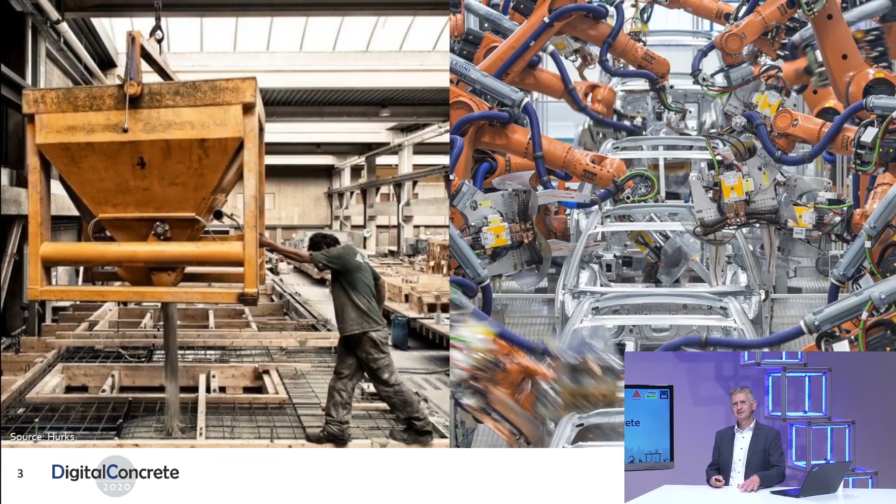And we're not the only ones doing that. If you look back in history, different industries already had that idea, to look how digitization could be helpful to improve on these societal issues, as you can see on this slide. We as a group, and more or less as a faculty as a whole, work on that issue of digitization as well, from different perspectives.

So we work on digital twins. We also work on artificial intelligence tools combined with material tests and with algorithms to bring robots to life, trying to combine AI with the issue of robotics.

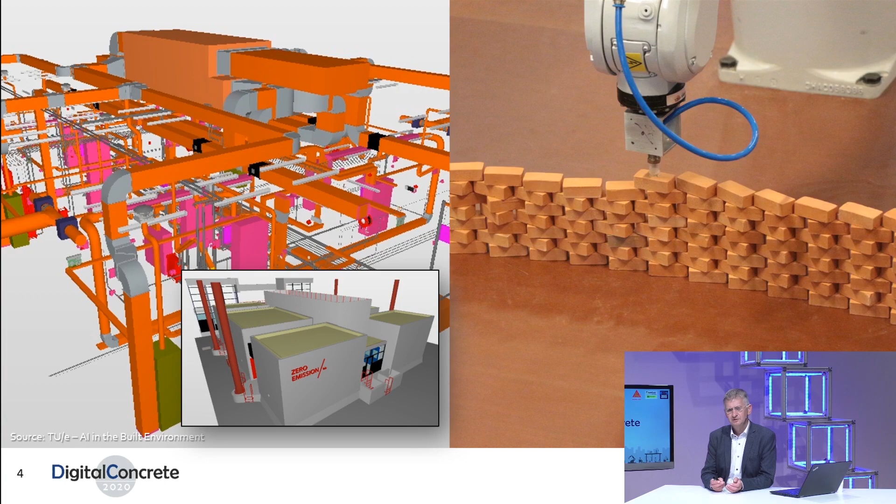As a chair in our group, as you are familiar with, we focus on the issue of 3D printing of concrete, and this large-scale gantry printing robot, I think, is known to many of you already. And with that instrument, we made a first bridge in Gemert.

And that was for the simple reason, coming back to your question for the meaning of the construction industry, to just try and make an effort in making something, show that to the industry and say, this is what we can do. Please reflect on it and tell us if that is beneficial for your industry as such.

What we realized from this kind of work, since it was the first time we did it, is that it is relatively difficult. It's not self-evident. It comes with a price because it's a complex system. You cannot just print whatever you have designed. The material, the design, and the printer need to come together. It's more or less a complex system that has to fit together and make a full system as such.

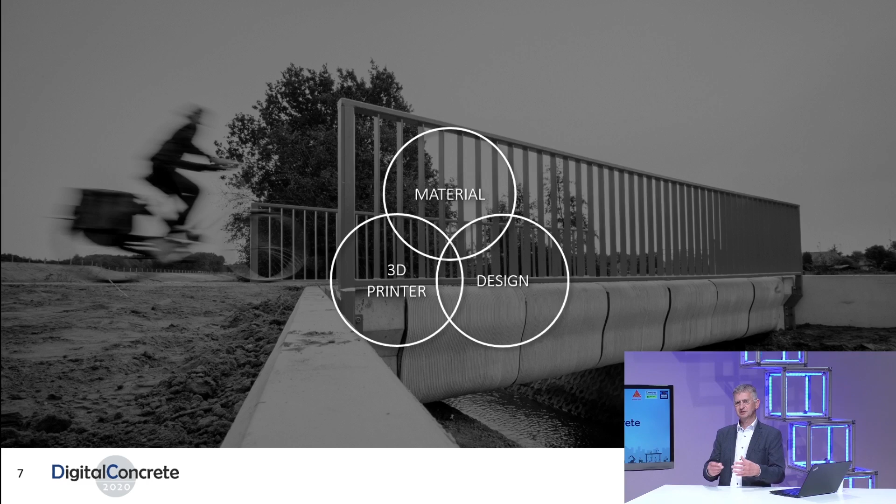Okay, so I guess it's important to emphasize that 3D concrete printing and other digital fabrication tools can provide an answer to these challenges in society, but at the same time it comes with added complexity, and we have to address this as well.

You wanted to illustrate this vision with two projects. Why these two? Yeah, I selected these two projects: a housing project, Milestone, that is currently being printed here in the city of Eindhoven as we speak, and a bridge project designed by Michiel van der Kley.

I selected these two projects to illustrate that our Faculty of the Built Environment is a typical faculty where built environment, buildings, and civil engineering are combined into one faculty. So I selected these two, and the second reason is that one is more difficult than the other, but I'll come back to that issue later in this talk.

Well, then I hope you can tell us a bit more about these projects. I would love to. Let's start with the building project.

These buildings, and I guess you have seen the images before, mainly the important part is the plan view. If you look at the plan view, what we did is we approached the design from the perspective of that complex system I just mentioned. What we see here on the slide is that we actually printed corner elements, so volumetric elements, not a straight wall, but walls in a corner, curved walls, because they are stable in themselves.

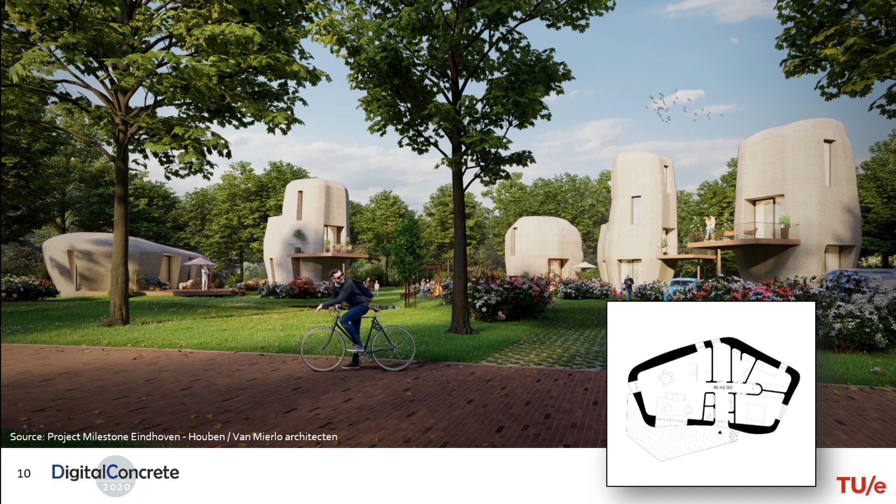And they were printed on a slab. So actually what you have is a part of the slab of your building and a wall already on top of it, and that's a wall with a corner already in it. So it makes it very stable, and it makes it easy for transportation.

That's the plan, and in between these elements, you could place framework elements and put your roof on top, so that the load-bearing capacity is both on the framework and on your printed concrete. That's the idea. And all of these elements can be reused again, of course, because you can place them in a circular kind of economy in different plans of different buildings.

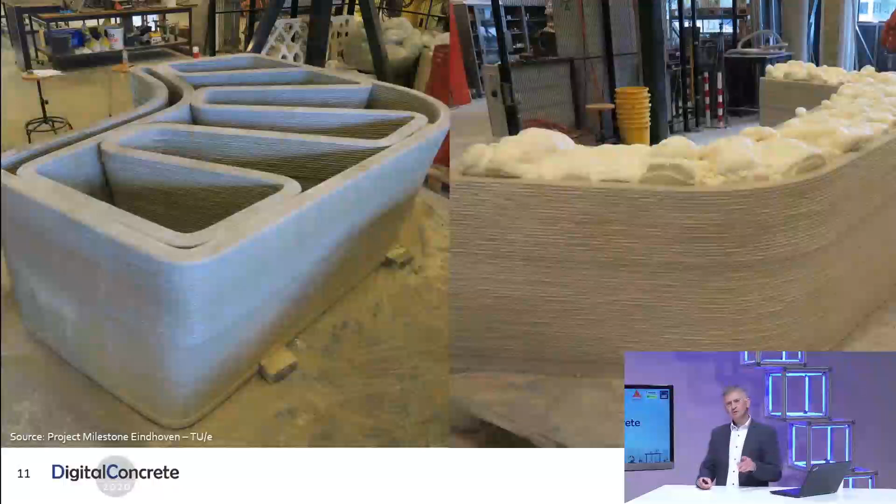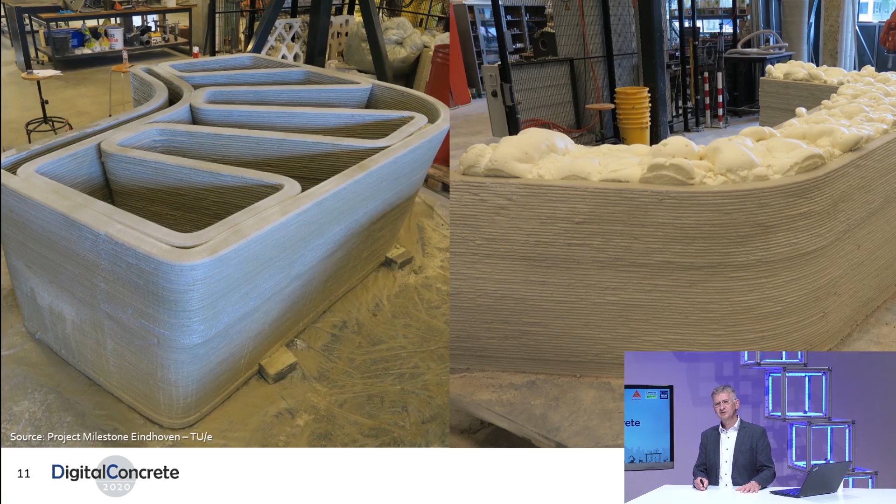If we look closer at these walls, on the left-hand side is an example where you print an inner and an outer wall, and connect them with a snake kind of pattern that we see often in 3D printing and extrusion processes. But if you make a real house, it must be comfortable, so you need to fill that in with insulation materials. On the right-hand side is a first try for the fill-in, but imagine that fill-in material could also be used for structural purposes, taking care of the shear capacity of the wall.

Then you can cut down on the amount of concrete that you actually print. If that's the system we're aiming for, it comes with a couple of questions.

For instance, in the fresh state, when you start to print this wall, it must be stable, and you want to optimize these sandwich kind of structures towards thinner and thinner walls, for reasons of sustainability. But it must remain stable during the printing phase, and your research work is a nice example of what we need to do in that case.

The other issue is in the hardened stage, when the concrete is hardened. If you make it thinner and thinner, it comes with stability issues again. And there, the presence of the insulation material should be beneficial and help the concrete not to buckle. So it's really a marriage between two materials here.

At the end, if you want to make these walls into a system for real life buildings where people live, you need to test them. And luckily, we are in a fortunate position that we can do large scale tests to see if the theory we come up with also works in practice.

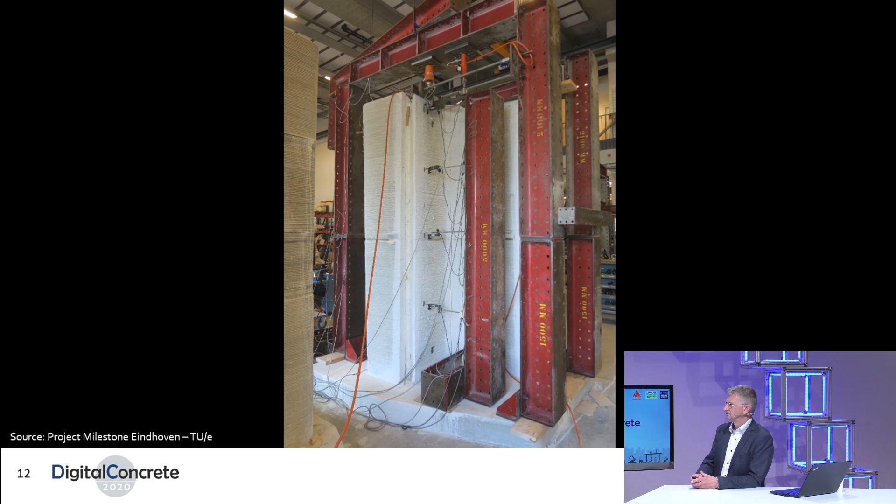That's very clear. But up to now, you've mainly discussed the design and the concept of Project Milestone. You mentioned also that it's important to consider the material and the 3D printer. Can you elaborate on these two topics as well?

I guess the message was already sent by the first keynote speaker, Robert Flatt, who had a nice formula saying that if you look at sustainability, you have to consider the amount of material and the amount of cement per unit of material, multiply that together, and divide by the lifespan of your structure. So talking about reduction of concrete, that's why we print, that's the additive manufacturing part. But yes, you need to discuss the amount of cement per unit of concrete as well.

In our group, we work on that issue, and it's our colleague Sandra Lucas, who unfortunately cannot attend this conference because she just gave birth to her first son. Sandra is working on the issue of materials together with the design, because in a complex system, these two things come together. Her work focuses particularly on two things.

The first is sustainability from the perspective of emission-free concrete, making emission-free concrete. The second is doing something different, adding functionality to the concrete, so that the concrete is no longer only the load-bearing part of the structure, but maybe also does part of the insulation itself, or provides electricity conductivity at some parts of the structure. So taking on more than one function, which is also a way to increase sustainability.

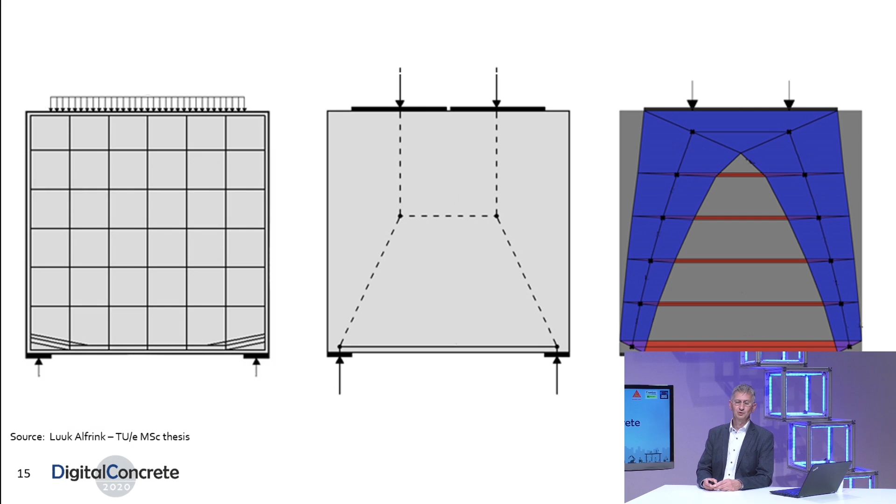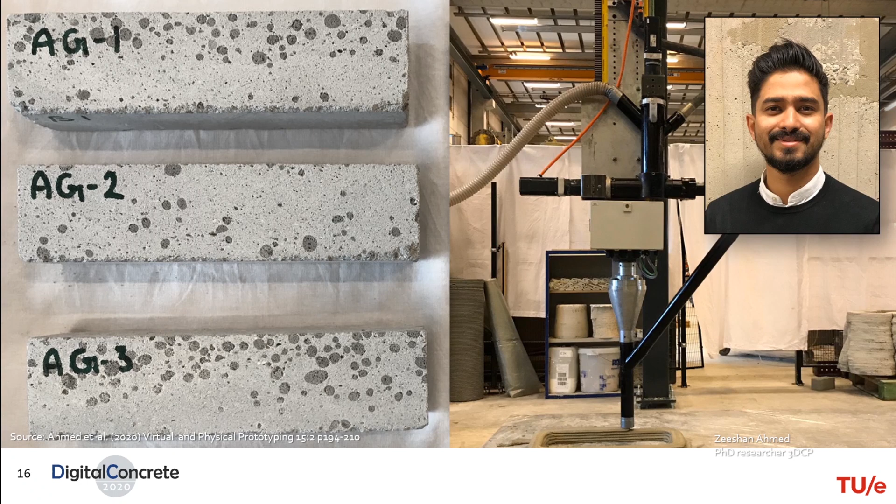One typical way of working with that is this. Zeeshan Ahmed, one of the PhD students about to graduate soon, developed a grading type of material where material is deposited where you actually need it. So concrete that is strong in one place, and at another place is just taking care of, for instance, thermal insulation. Imagine going back to the sandwich wall picture — if we could print a sandwich wall but apply different material properties at different places, you'd have a kind of hidden structure you can't see with the naked eye, where one part does the structural job and another part does the thermal insulation.

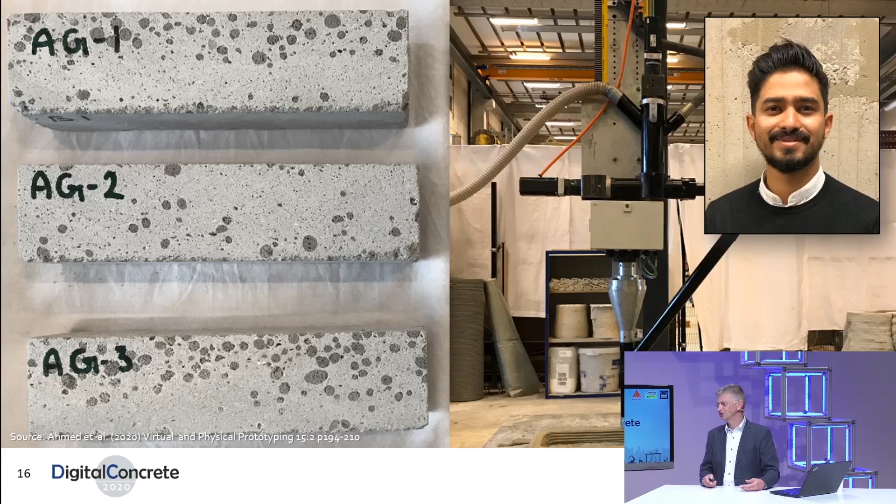Making things like that comes with a price, with a cost. So you really need to do research, because in the end you want to be sure that the right concrete is at the right place with the right properties. Starting from the perspective that the properties of concrete must be good, you need to think backwards about what you need to do in your mixing, your pump, your hose, to really get that done. That's what Derek Bos, one of our PhD students, is doing in his research here at our university.

At the same time, you have to do something on your machine, your robot as well. This is one of the early things we did when we got our gantry robot — we mounted it so we always have a fixed height for the next layer on top of the other, to stay in control and avoid issues like the poor bond we've heard a lot about at this conference.

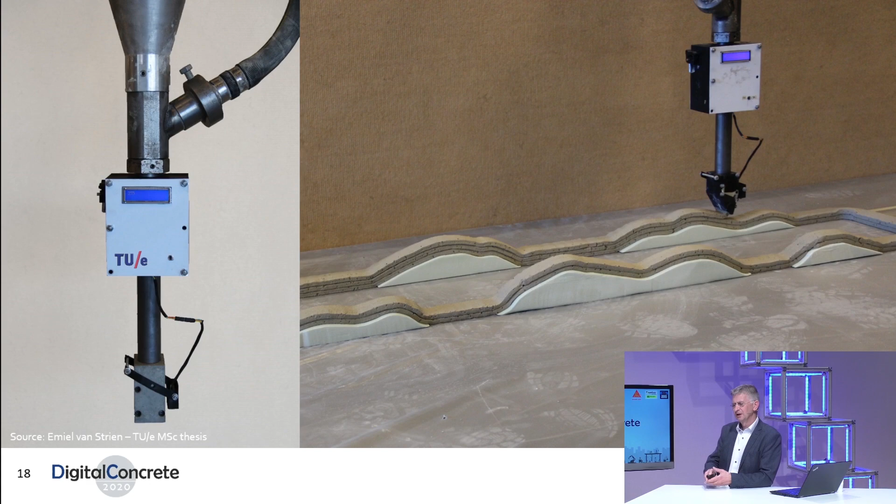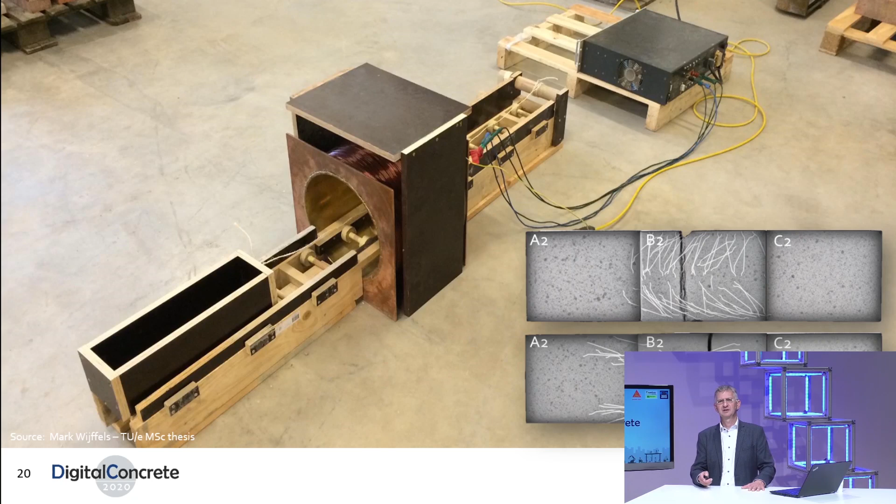Other things we do to stay in control include playing with temperature — what temperature means on fresh concrete, related to stability issues of course. And one of the most unusual things we've done, and will likely do again in the future, is controlling fiber orientation even after printing, using magnetic fields.

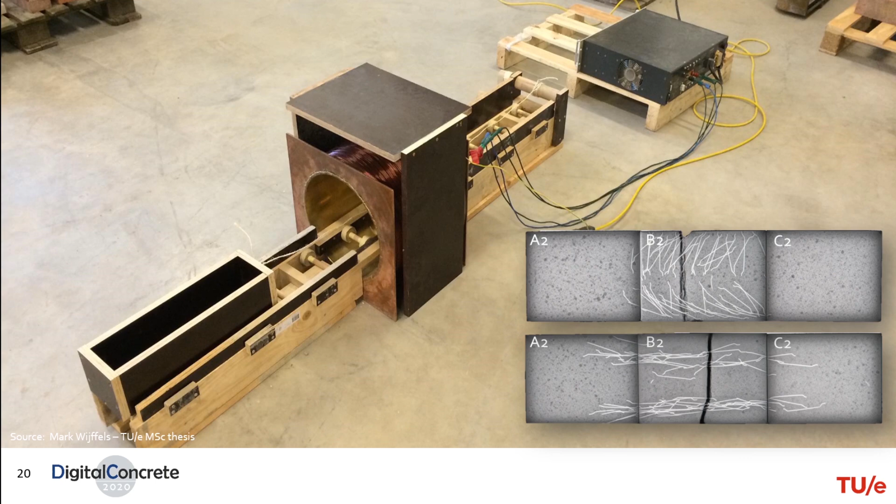Talking about that complexity, to wrap this part of the story up — what we do is modeling, and at the same time testing in the laboratory. But in this age, a third thing comes into the picture, and that's data. We're going to use data to add to that story and help us solve more complex issues.

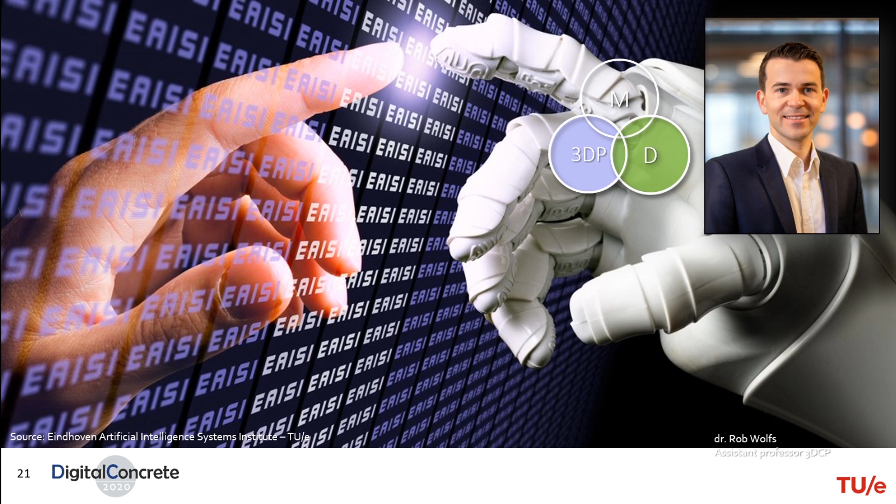And that's your cup of tea in your research work.

Right, absolutely. It was also Maarten Steinbuch, one of our keynote speakers on Tuesday, who said data is crucial. So we will have to start combining numerical approaches and simulations with data-driven approaches like non-destructive measurements, to be in full control of the process. I think we can learn a lot by venturing into other fields and connecting with other industries to bring our technology one step ahead.

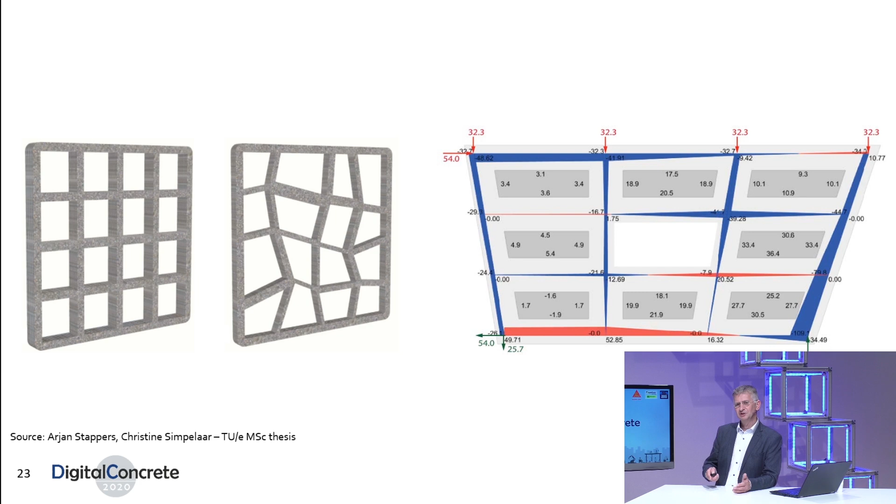We call it the stringer panel method. It's a simple design tool, very simple to design with tools like this. From that, we came to the idea to not optimize only from a structural perspective, but also optimize these walls from a perspective of lighting, making walls and facades that are not only structurally optimized, but also optimized with respect to the amount of light coming inside our buildings. And with that came this picture.

But you're questioning me, Rob, but actually this is the work of your studio this year. So I challenge you to explain the picture yourself. Okay, I will. This is actually the excellent teamwork of three of our master students, Tessa, Irma, and Jelle.

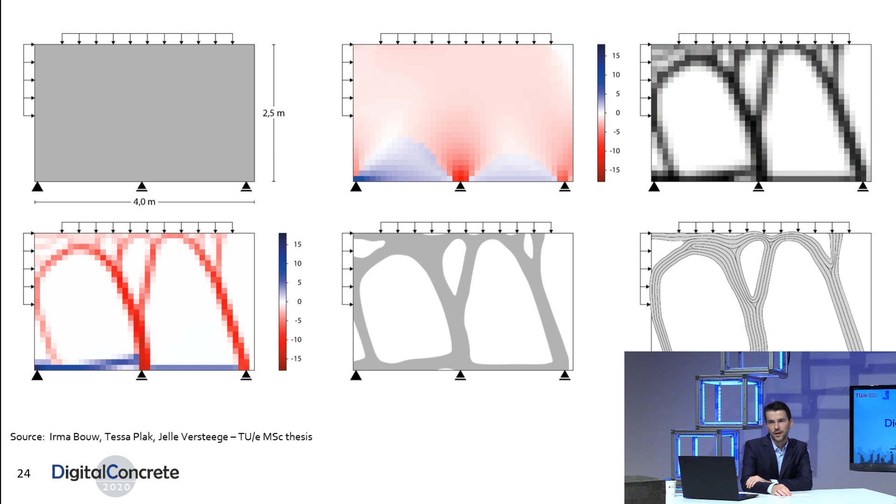The next step is to transfer this into a solid geometry and generate print paths. For that, we use evolutionary algorithms to select the best, quickest print path within millions of solutions, making sure that also at the nodes, print lines do not cross, and that we have proper anchorage of, for instance, reinforcement in these elements. So I think this is a very promising development in our field.

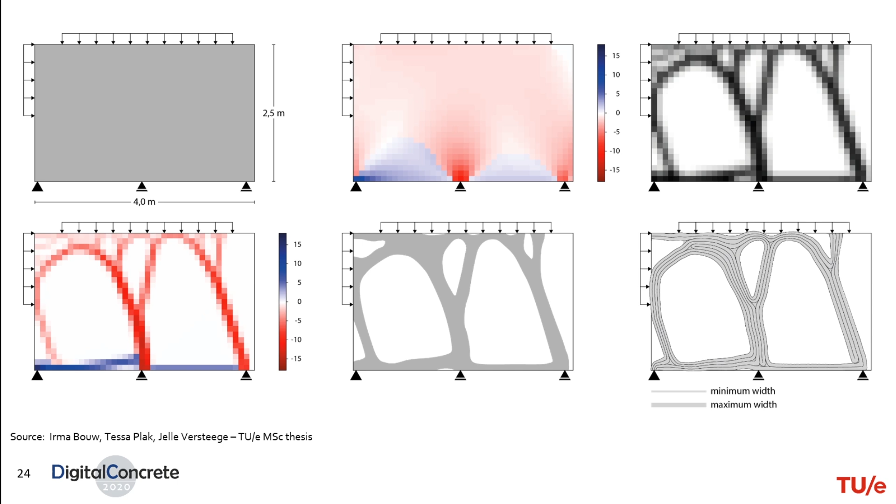And again, Rob, I think you have to combine that again with the type of material that you use and the capabilities of your robot to make it a complex system again. Absolutely. Yeah.

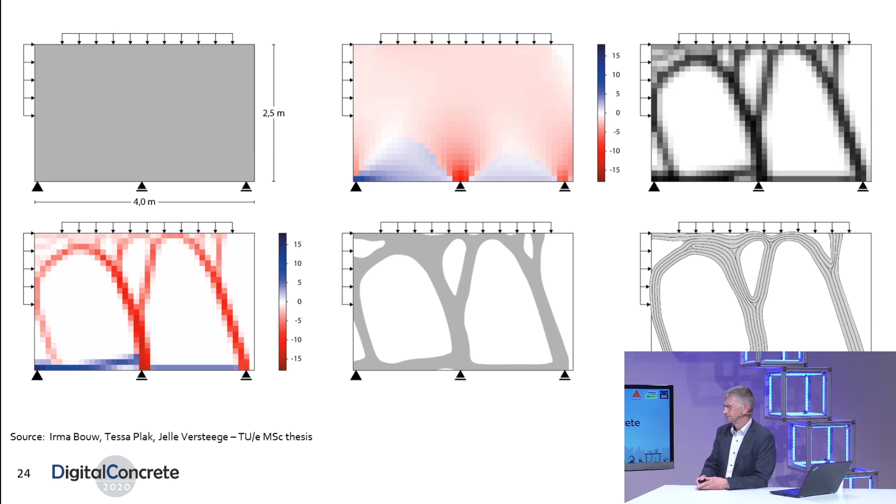Having said that, I think there is a downside to this thought, because before we become too enthusiastic about it, there's always a but. In this case, it's about the joints. The advantage of working on milestone projects with these corner elements is that there are no joints, only the joint between the window frame and the concrete elements, but that's a non-structural joint. But if we work on wall structures and slab structures, and we need to connect slabs and walls together, there must be connections that are capable of carrying loads.

However, if we move to the other structures we just showed, the wall elements, we need connections that can carry loads in compression, tension, but also in shear, and hopefully in the future in bending, but let's make that the next step, I would say. And that makes it more complicated. So we really need to look after that.

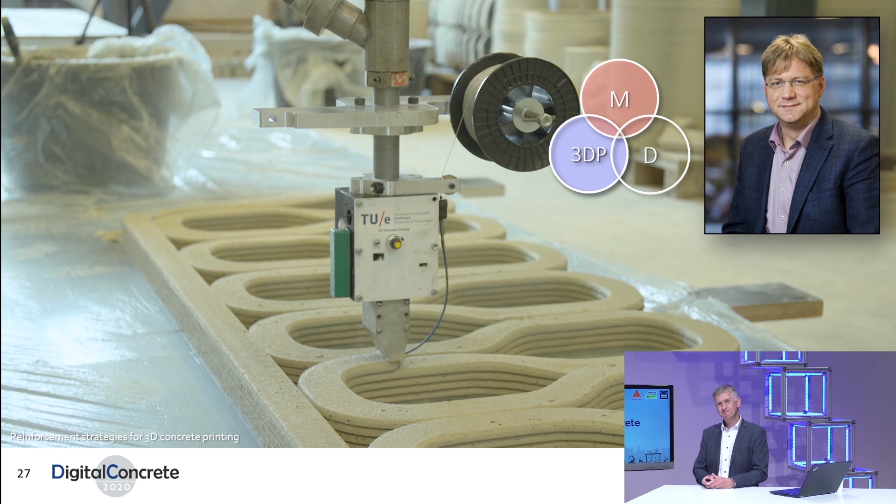Yes, Jimmy, I will address the issue of reinforcement. And we already addressed it a long time ago. Zeeshan Ahmed, who I introduced earlier during this talk, developed this tool to embed the reinforcement wires immediately during the print process.

But that's one thing, making the tool is step one, but then the next step, of course, is to go further in this field and investigate the true meaning of reinforcement systems like that for 3D printed concrete from a structural perspective. And that's the research field of Freek Bos, looking after the structural properties of reinforcement.

And of course you have to combine that again with the material, because one comes with the other, so the complexity is here again. His research work is on finding out what the true meaning of reinforcement systems like this is in terms of bond between concrete and steel.

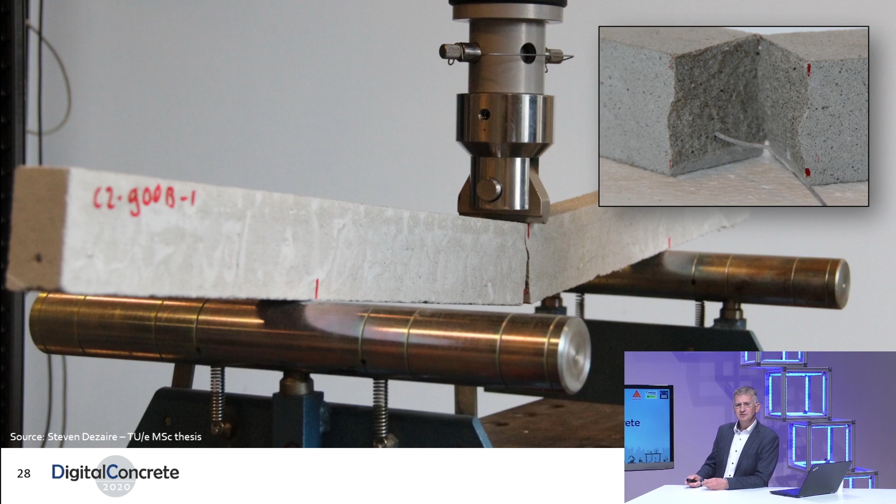It started with something like just confinement and is now developing towards real bending structures, where the reinforcement needs to have a good bond with the concrete, as you can see in the picture here. But that's still reinforcing in the direction that we are more or less familiar with already.

The next step he takes, together with a PhD student, Lauri Hass, who you met before in this conference, is working on the perpendicular direction. So that's reinforcing layer by layer perpendicular to the layers, in this example by using a screw type of reinforcement.

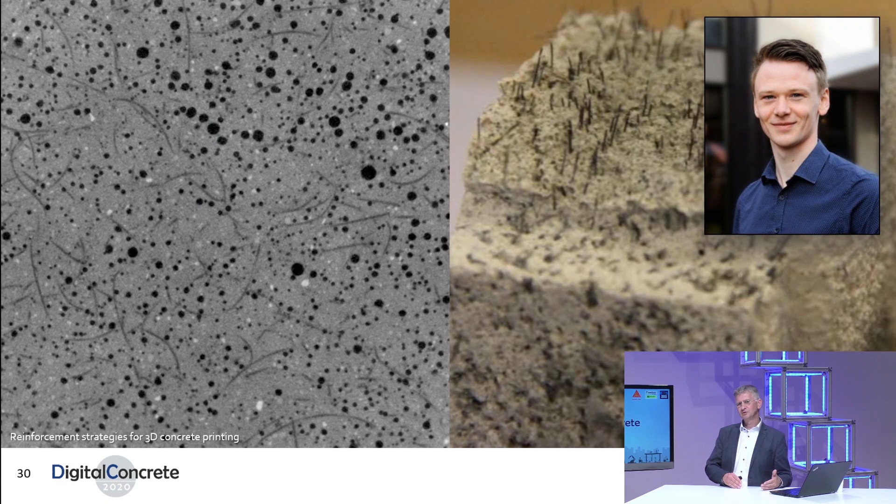Another idea of working on reinforcement, but okay, we can argue whether this is reinforcement or an improvement of the material, is the introduction of fibers into your matrix.

The picture on the right-hand side is an old picture from the work of Zishan embedding the fibers in the structure, now being followed up by Karsten Nefs, another PhD student you have seen here on stage during the conference already. He's working now on totally different types of fiber reinforced concrete, the ECC materials, where not only fiber orientation matters, but also fiber shape matters, because they're not straight anymore.

And what we always want to do, as I told you at the beginning, is try to do experimental research, do laboratory research, at the same time make numerical models, and have that data AI tool available. He is, for instance, using an AI tool to get a grip on image capturing and making models from that, using neural networks to create these structures, as you can see here.

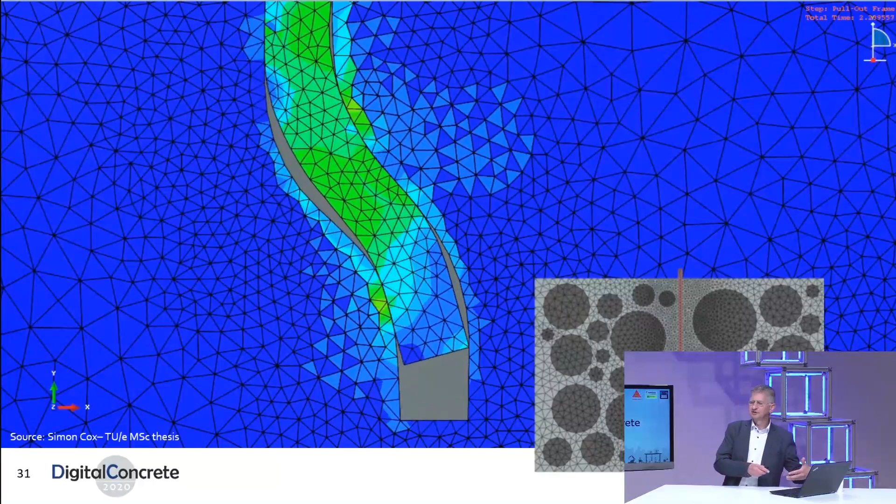This is one of the examples of the numerical models that we use. This is just an example of one fiber being pulled out of concrete using cohesive zone modeling. And that's something that, to my pleasure, I saw during this conference as well from multiple authors working on issues like this.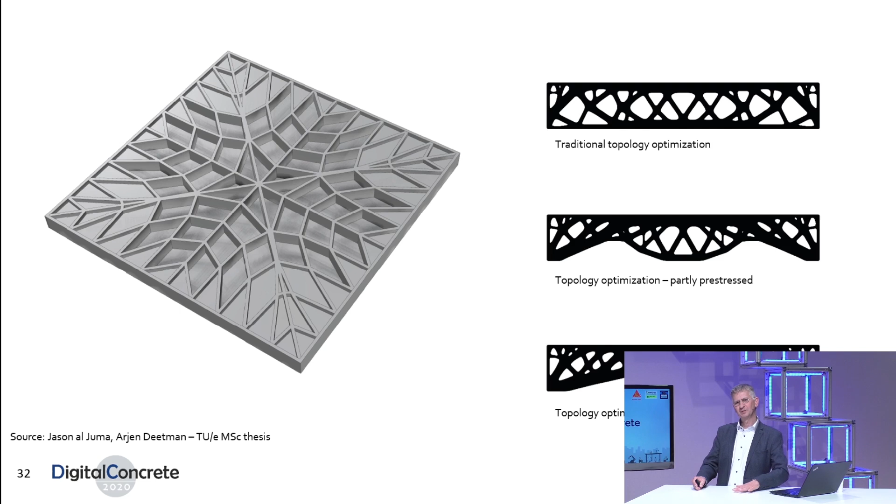What we did here is we tried to make it reinforced as a slab, made it pre-stressed as a slab, and tried to make numerical design models that not only took into account where to place the material, but also how to deal with the pre-stressed ducts.

So the level of pre-stressing was determined by the position of the load. If you stand in the middle of the slab, the pre-stressing is different from the moment you step on the slab, just at the edge. This technology is promising, but it's a little bit ahead of us, I would say.

One of the interesting things about this type of optimization is that we try to make use of the concrete to the best of its capability. So stressing in compression, yes, we benefit that, but if the material is stressed in tension, we punish it a little bit. That kind of algorithm is built into these design tools.

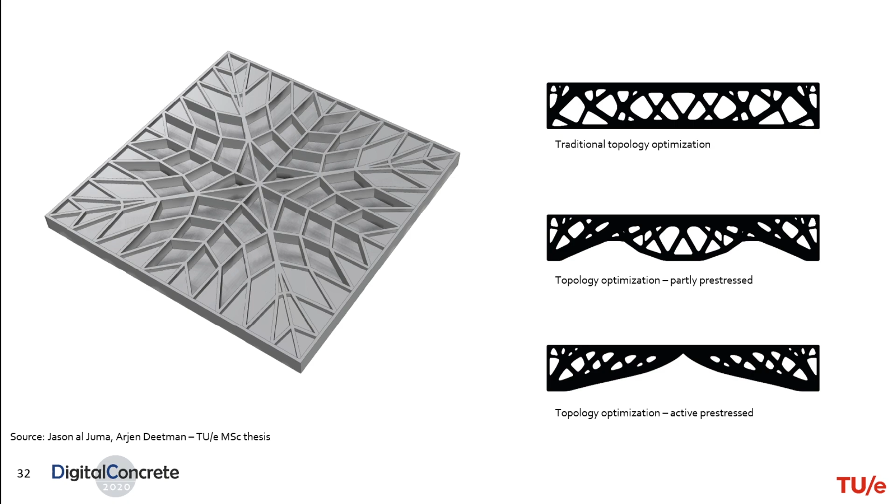So from floor slabs and beams, it's not that big of a step towards bridges. And one of the first projects that you showed was also a bridge project. Do the same principles that you've shown us up to now also hold for such structures?

Yes, they do. But I made you a promise, so I have to keep my promise. Is it more difficult or more simple? To my opinion, but it's just an experience of a couple of years, it's maybe more easy.

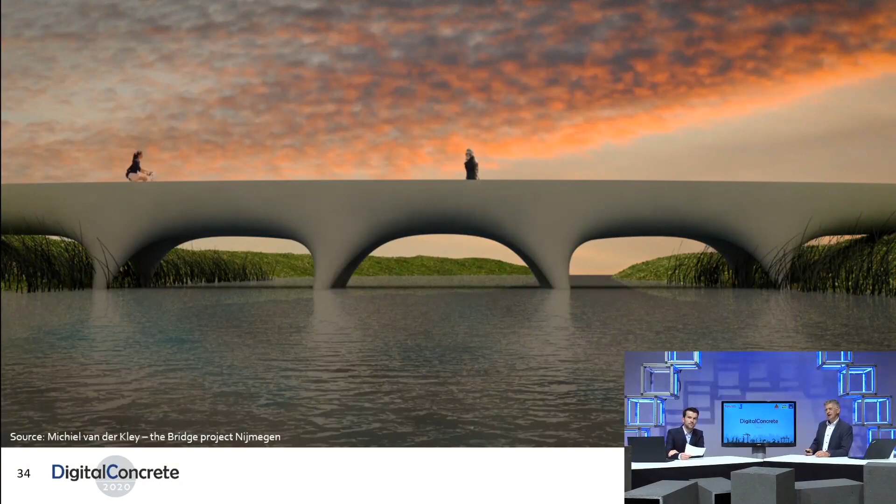If you look here together at the nice bridge designed by Michiel van der Kley, we tried to realize this bridge, made a mock-up, and saw if it actually holds. So actually here again we had a concept.

Each cross section was printed from a parametric model, obviously, and after that flipped over 90 degrees and stacked together. In this mock-up, we glued all the elements together, but in the future, for reasons of circularity, we would love to have cold joints so that everything can be reused again.

So the principle is relatively simple. You print a cross-section, you flip them over, and you stress them together. It's a relatively simple concept, I would say.

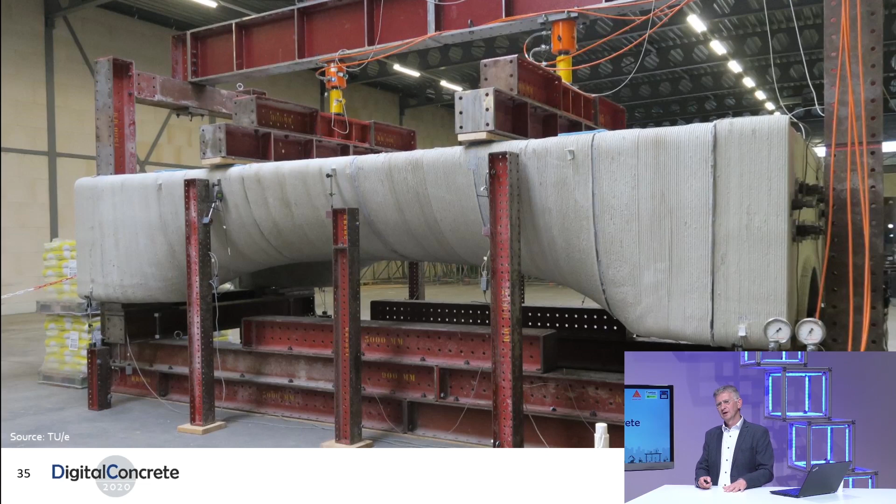I showed you a big picture with a large-scale test, but everything starts from small. If you do a project like that, you have to start by understanding your material properties first.

That's the research work that you did yourself, for instance, and many others here at the conference, joining the conference, finding out the properties of fresh material with different tools, and finding out the properties of hardened materials and interface behavior as well. That's key. You need to know that before you can make any design and rely on your structure.

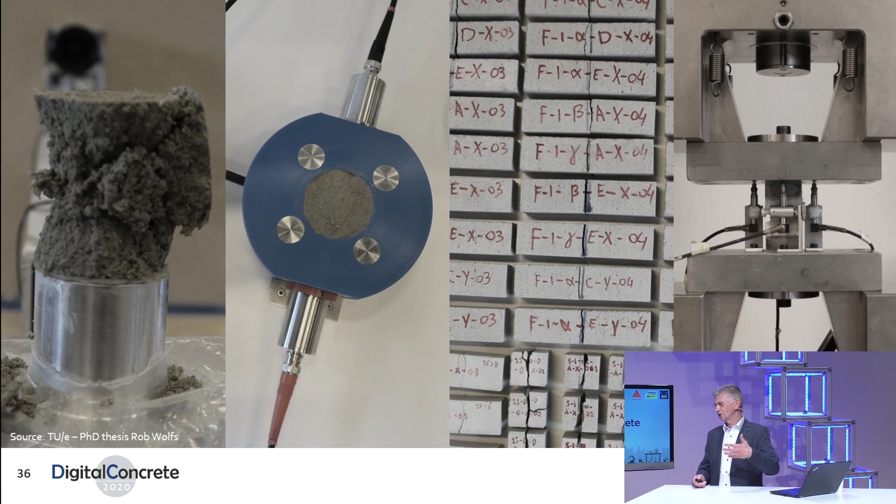And the final step, yeah, that's where you start to really test a large-scale bridge. As I showed you, designing from the house that we made for Milestone, and going from Milestone to the different types of walls, you can go from that type of bridge to this type of bridge.

And again, the story of doing things big and doing things small matters here, because we purposely asked you to be in this picture to make the bridge look a little bit bigger than it actually is.

Well, thank you, Theo. Perhaps you can share a serious note as well to end this keynote. I will do, and I like to do that.

First of all, before I do that, I would like to say that everything I'm saying here is the result of a series of people that I just introduced, and that we are really in the fortunate position that we can even extend our group with the positions that you can see here on the screen.

And it has a meaning that I show that to you. It's because I'm really proud of the team, but at the same time, it is because we as a team would like to stay with you, not only during this conference, but also the days and the months after.

What we have experienced here, doing this conference in an online fashion, it was not only a hassle, but it also brought us something. It showed us that it's possible to be live together from a distance. What we aim for, and hope that others will follow this idea, is to meet on a regular basis, exchange ideas on tests, maybe even put cameras on the test facility, show the tests immediately so that you have a first impression on how things are going from another part of the world, and have the data available as raw materials so that you can study them yourselves.